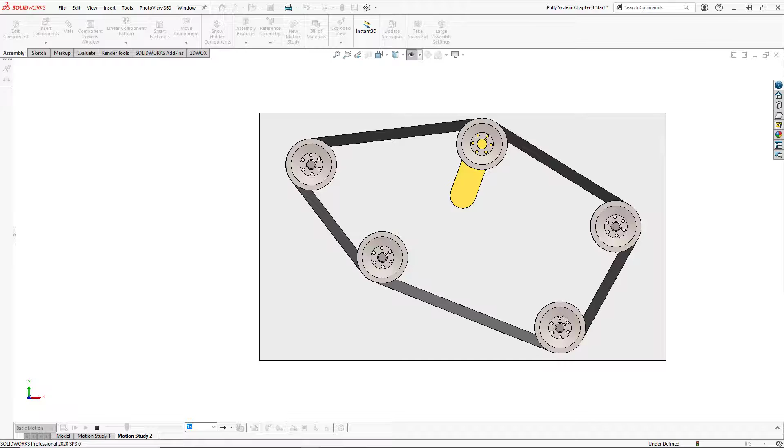Greetings everyone! In this tutorial we're going to go over how to create this pulley system in SolidWorks. We'll start by using the belt chain assembly feature to link all of our pulleys together so they rotate in unison, kind of like a gear mate. Then we'll create our physical belt using the sketch created from our belt chain feature and a simple sweep. This will be a great tutorial for anyone planning on taking the Certified SolidWorks Expert Exam, as belts and chains are one of the possible topics they'll ask you about on the test.

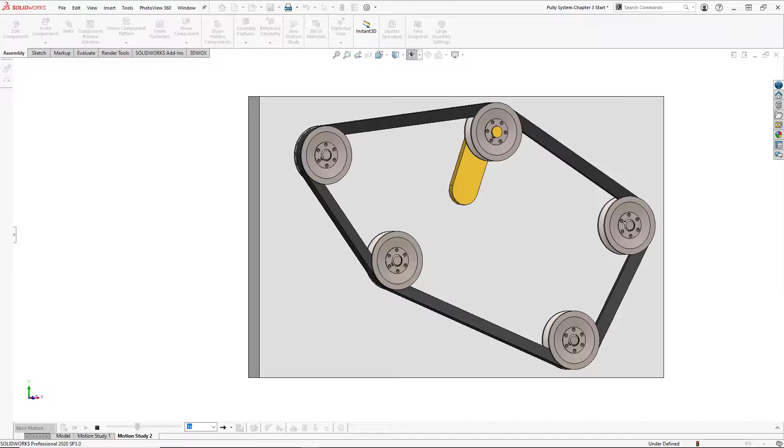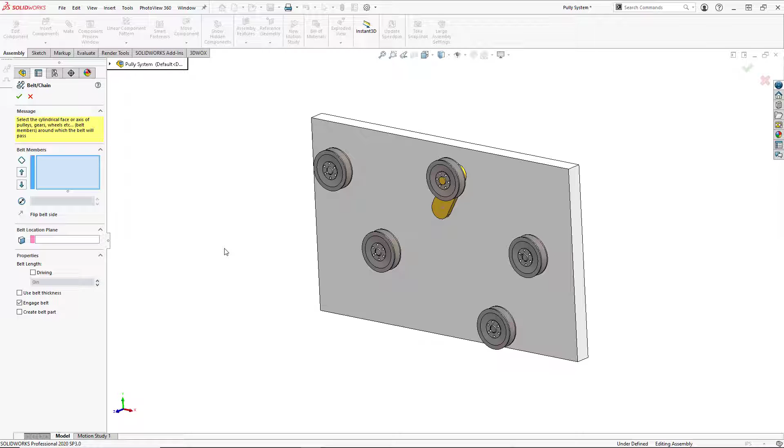Now let's get started. To create our belt feature, we're going to go to Insert, Assembly Features, and select Belt Chain. And we have to select our belt members, which is just a closed loop of arcs that the belt will contact. We're going to select the inner groove of our pulleys for this.

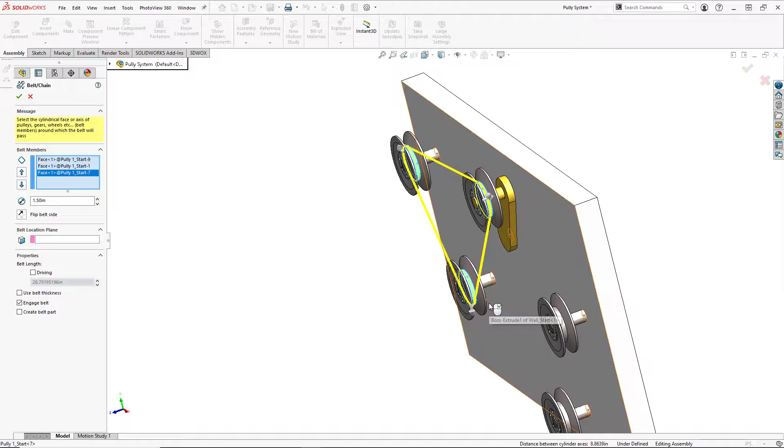As we select the different pulleys, you see that the projected sketch of the belt is starting to take shape. It's important to select the belt members in a sequentially ordered loop, otherwise they might get twisted.

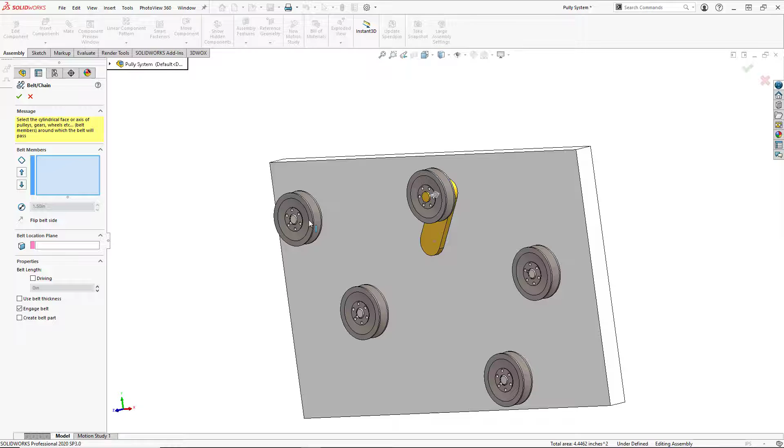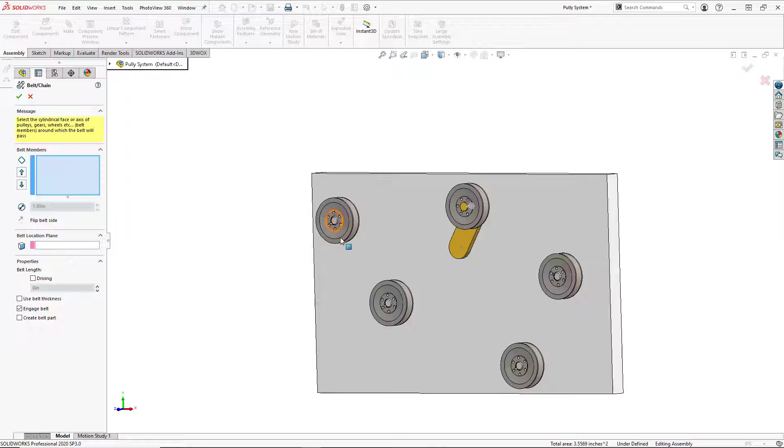So there we have our proper belt, but if we were to clear our selections and select them in a random order, we see that the belt can quickly get tangled, like so, which is no good. So we'll clear our selections again, and we'll just select in this sequence here. And there we go.

And we have a few more options here. We can set the diameter of our pulley. It's automatically pulling 1.5 inches from the physical pulley part, but if we wanted to customize that, we could. We could also flip the side of the pulley that the belt is on, like so. We would use that mostly if it glitched when we were selecting them and put the belt on the wrong side.

We can also select a belt location plane. This is a plane to offset the sketch for our belt if we wanted to. We won't need that, so we'll keep it on the pulleys themselves.

And then we have a few properties down here. The belt length is shown here. If the position of the pulleys is not fully defined, the length can actually be driven and the pulley position will update to accommodate the length. It also gives you the actual length of the belt here, so it should be 41.53 inches.

And we can use our belt thickness if we wanted to. This would offset the belt from the surface if, say, you were using a specific thickness.

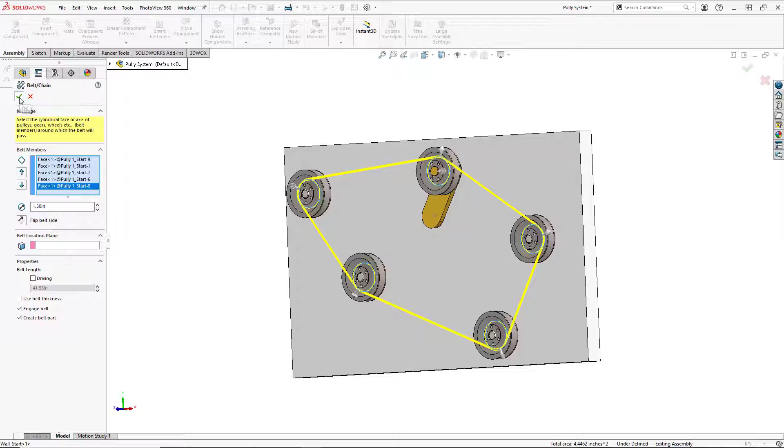And we'll hit the green checkbox. And you should get a pop-up window to create your part for your belt. So we want to know what template to use. So we're just going to use our basic part template that comes with SolidWorks and hit OK.

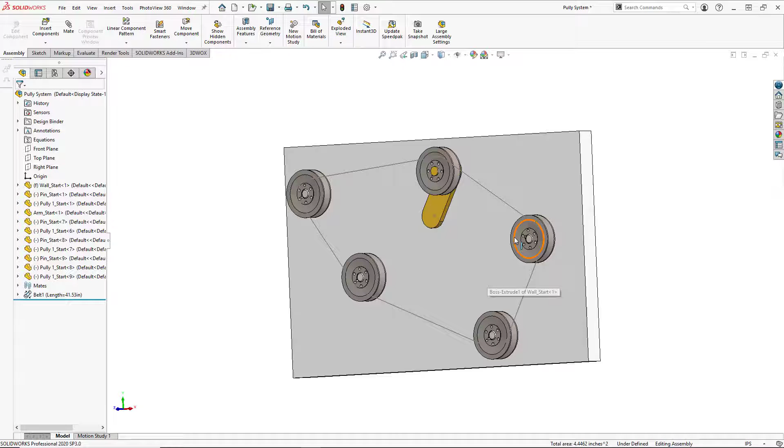We now see that we have a sketch here for our belt, and that if we rotate our pulleys, they all rotate in unison with one another, as if a belt was linking them. On our feature tree, we have a new feature, a belt with its length. And if we expand it out, we have our sketch, and then we have a belt part here. And if we expand that out, it just has a derived sketch based off of the sketch from the belt feature.

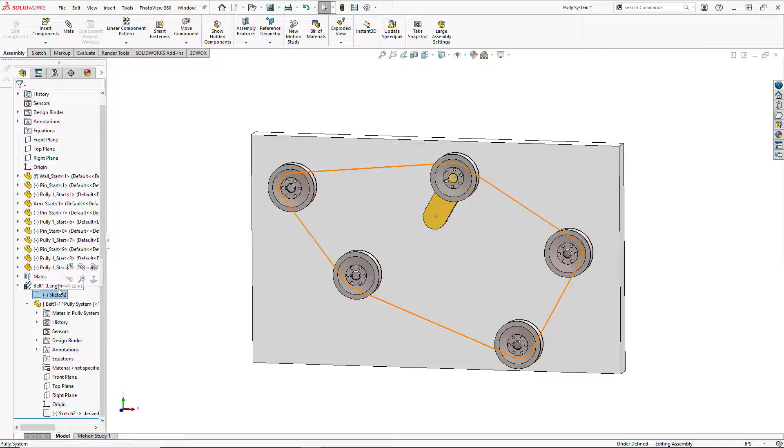Now that we've created our belt feature, we can use it to create our physical belt. Let's start by opening up the belt part where we just have the derived sketch.

We're going to use this sketch to create a sweep for our belt, but we need to create our profile sketch first. To do this, we need to create a plane that is perpendicular to our sketch. So we'll go up to Features, Reference Geometry, and select Plane.

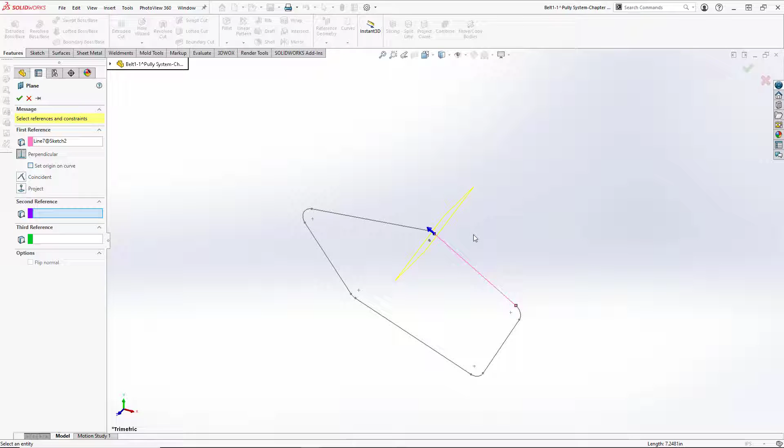For the first reference, we'll pick this line here, and we will set it to be perpendicular. For the second reference, to fully define the plane, we're going to pick the endpoint for this arc right here. Now that our plane is fully defined, we'll hit the green checkbox and then go to Sketch to create a new sketch on our plane.

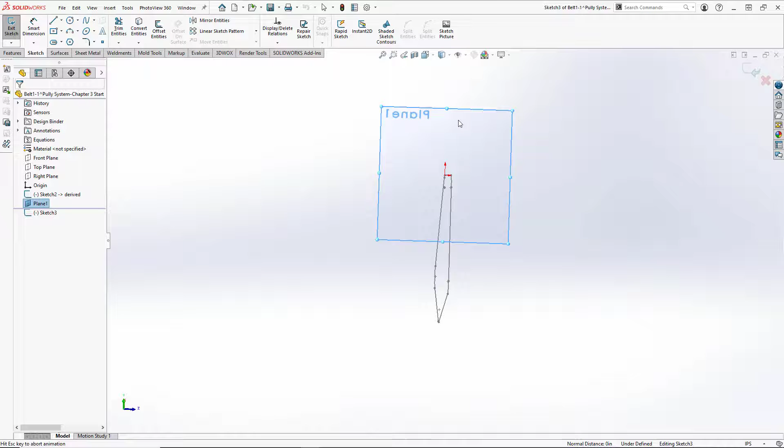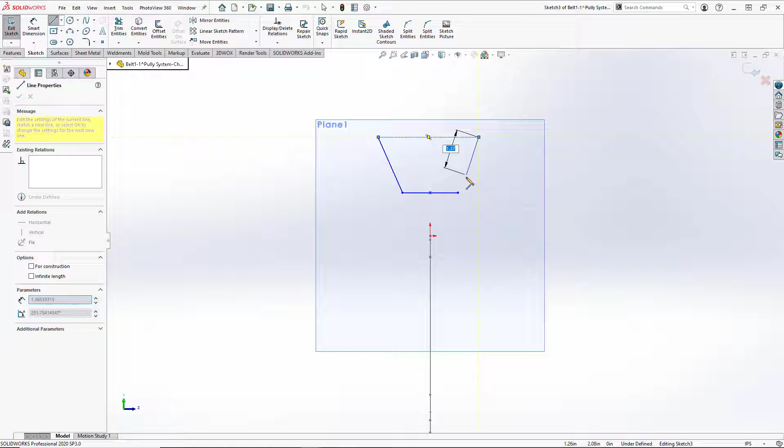We will go Normal To, and start our sketch for our V-belt. So we're going to actually start with a midpoint line, like so, and then just a normal line like that, a horizontal line, and another tapered line.

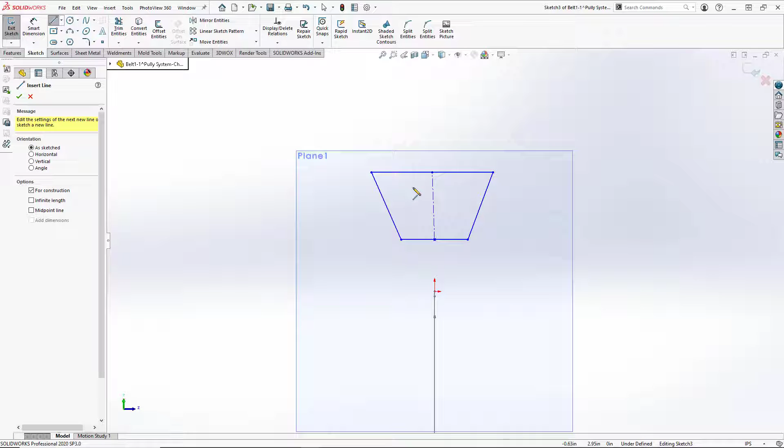We're going to add a center line that runs from the center point there to the midpoint of our top line. We'll double click to close out our line segment, and we'll make this center line vertical.

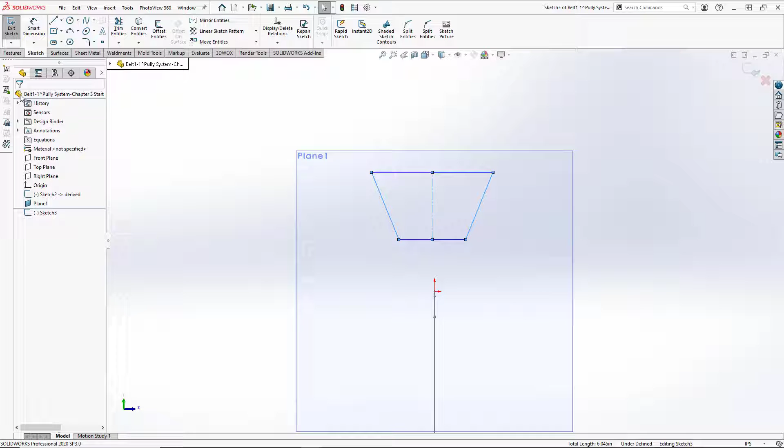We're going to hold Control and select our two outer lines and the center line, and we're going to make them symmetrical to one another, so that as we move one, the other one follows, like so.

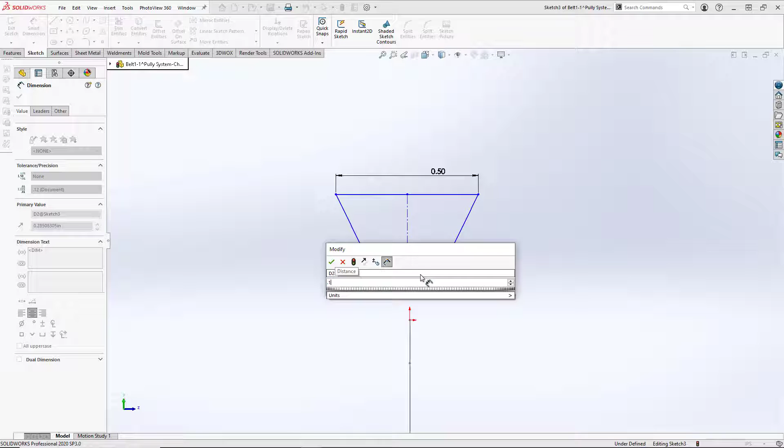Now we're ready to start adding our physical dimensions. So we'll go up here to Smart Dimension. Our top edge is going to be 0.5 inches. Our bottom edge is going to be 0.19 inches. And our belt height is going to be 0.5 inches. We'll hit Escape to close our dimension tool.

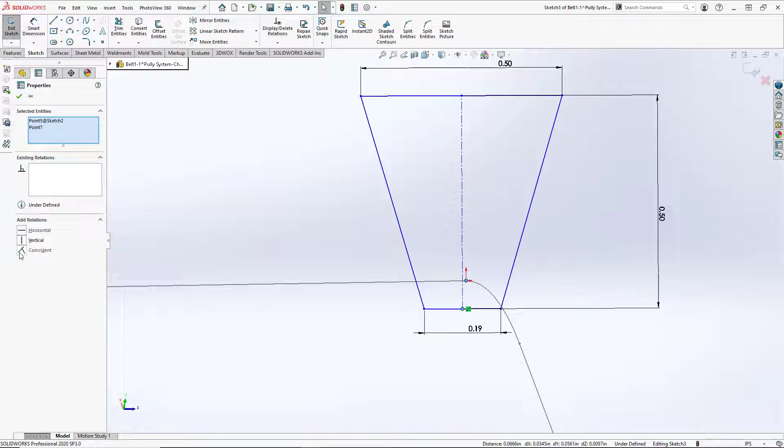Now we need to fully define the position of our sketch. So we're going to hold down Control, select the bottom midpoint, and then select the origin, and then make them coincident, like so. Now our sketch is fully defined, so we will hit the green checkbox and exit our sketch.

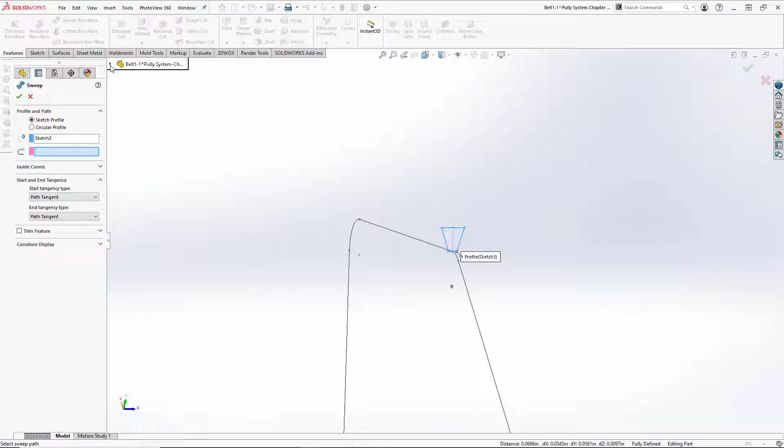So now we need to create our sweep. To do this, we're going to go up to Features, Swept Boss Base. It automatically selects the sketch we just created for our profile. For our path, we're going to expand our feature tree and select sketch 2, and hit OK.

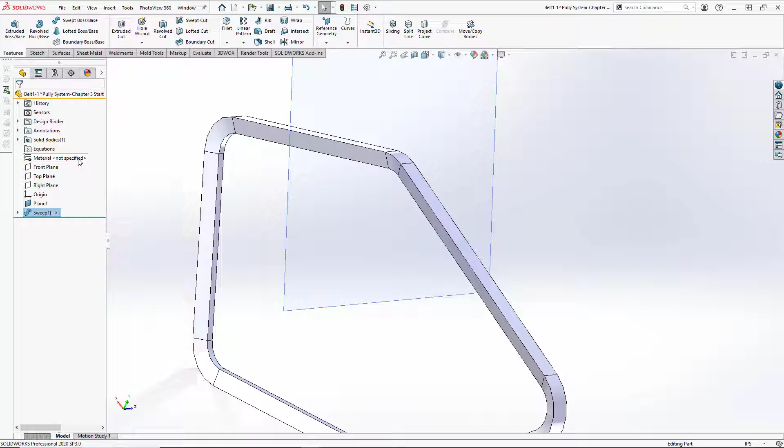So now we have our basic model, but it doesn't look quite right. So let's set our material to rubber. We'll right click, go to Edit Material, and go down to Other Non-Metals from the standard files that come with SolidWorks, and select Rubber, and hit Apply, and Close.

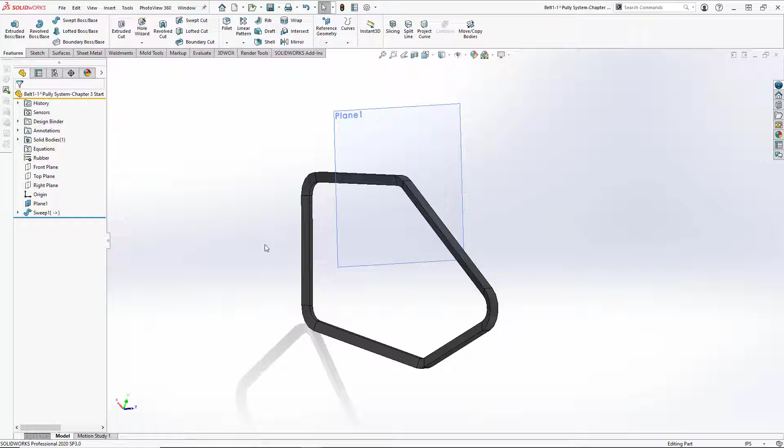So now, if we go back to our pulley system and update, we see that we have a belt in place. Now the belt will not actually move when we spin the pulleys, but for things like animations, it will create the appearance of a correct part.

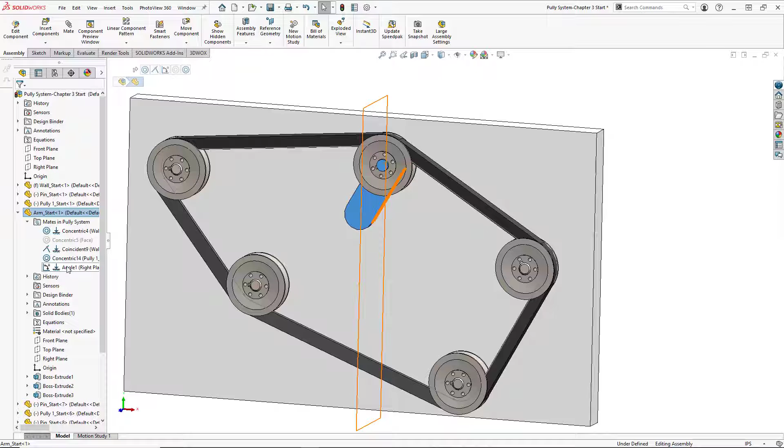And if we adjust the angle of our idler pulley here, so we'll go by adjusting the arm, so if we change this angle here from 150 to, let's say, 160, and hit refresh, we see that the belt has updated dynamically with it.